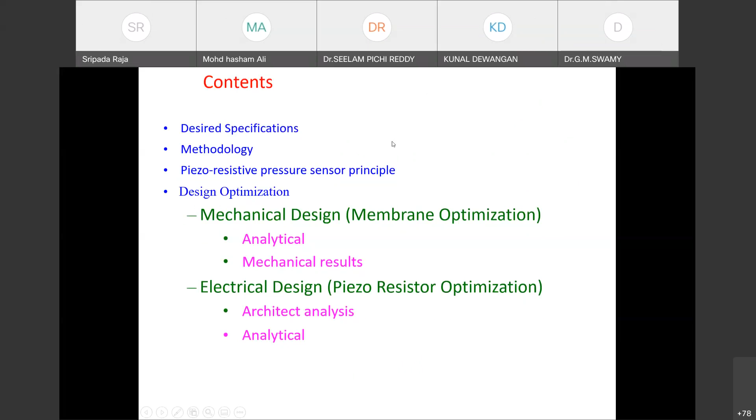Here we have two parts: one is the mechanical design and another is the electrical design. We have the desired specifications that we define, then the methodology of the design, and the piezoresistive pressure sensor principle, which we discussed, and then the design optimization, which involves mechanical and electrical modes.

So desired specification, we'll go ahead with this. We have the measurement mode, the absolute pressure. We have two types: one is absolute pressure and one is the differential pressure sensor. So we are designing the absolute pressure sensor.

Second is the operating range, which is about 50 bar. 0.1 megapascal of pressure is equal to 1 bar of pressure. We have the proof pressure, set for 1.5 times the operating range, and the burst pressure of 5 times the operating range. Non-linearity is less than 0.5% full scale, and sensitivity is 10 millivolts per volt per bar. We have the full scale operation of hysteresis, base resistance as 2 kilo ohms.

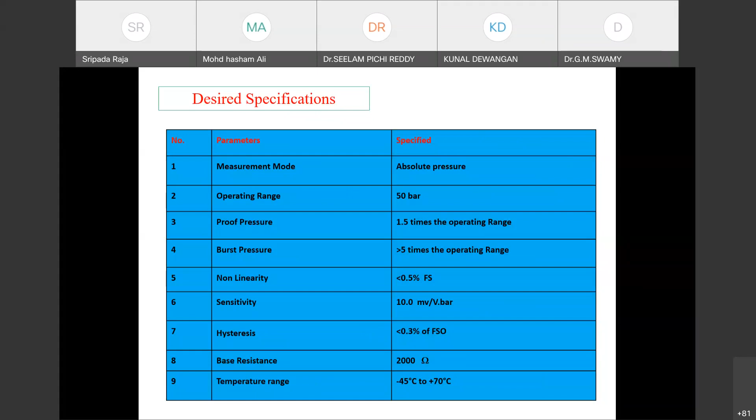So keeping these as the desired specifications, how do we optimize or design the device? That's what we'll be doing. The MEMS pressure sensor transducer development methodology starts from MEMS pressure sensor design and fabrication, and signal conditioning electronics, and PCB design and fabrication.

Here we have the sensor which measures the signal, and we have the signal conditioning system which captures the signal provided by the MEMS pressure sensor.

Excuse me sir. Processes the signal. Sripad sir. Yes. Yeah your voice is a little bit low sir, can you adjust your mic? Oh, is it? Okay fine. Is it fine now? Yeah, yes. Is that fine now? Yeah, yes sir. Okay, yeah.

And then we have the pressure sensor transducer assembly package component, and the fabrication with electrical and mechanical interfaces, and testing is what we do.

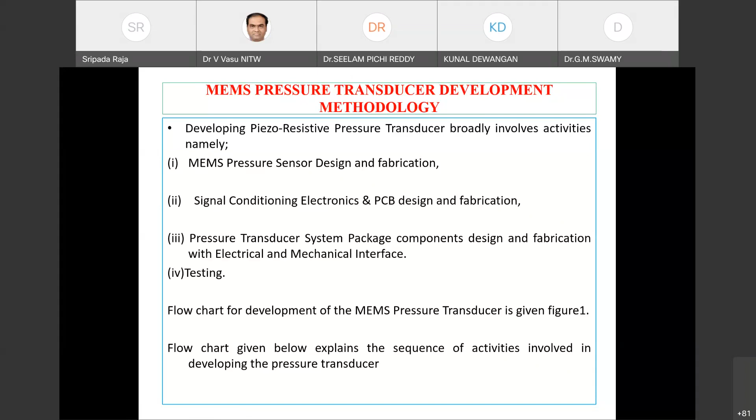And then here we have the cycle of how the flow chart works, from the user specification start, to how we achieve the working model of the device.

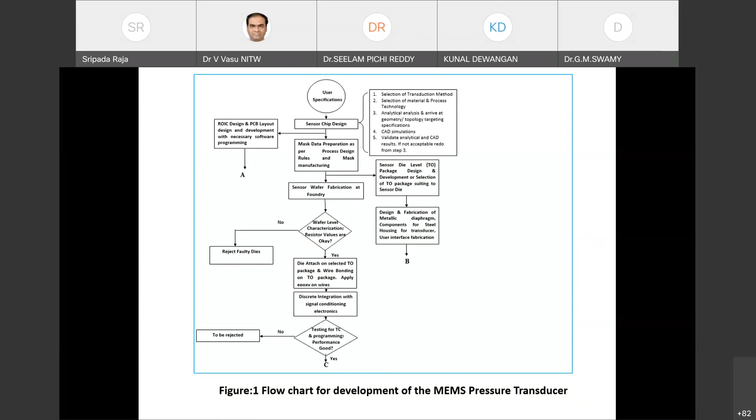We start with the user specifications and the sensor chip, then we have the mask data preparation and sensor wafer fabrication. So this is the method that we adopt.

The pressure sensor has 4 resistors in principle, and 4 of them are connected in Wheatstone network mode. Typically we use an N-type silicon diaphragm with P-type piezoresistors. That's the technology and materials we adopt. The piezoresistors are realized by selective doping, injecting boron into the diaphragm. So that's the piezoresistive P-type piezoresistor in an N-type substrate.

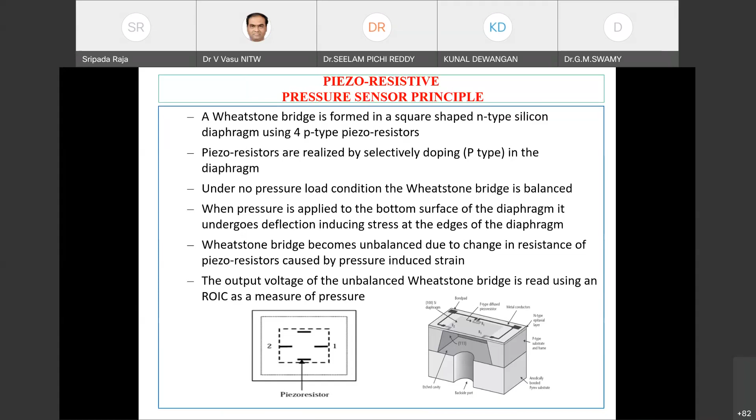Under no pressure condition, the Wheatstone network or bridge is in balanced condition. When pressure is applied to the bottom surface of the diaphragm, it undergoes deflection, which induces stress at the edges of the diaphragm. So let's look into each one of them.

Going to the mechanical design optimization, we have the membrane design criteria. The membrane that we want to deflect due to applied pressure can be calculated using the Dmax formula. This Dmax formula is used to find out, for the applied pressure, what is the maximum displacement that is happening.

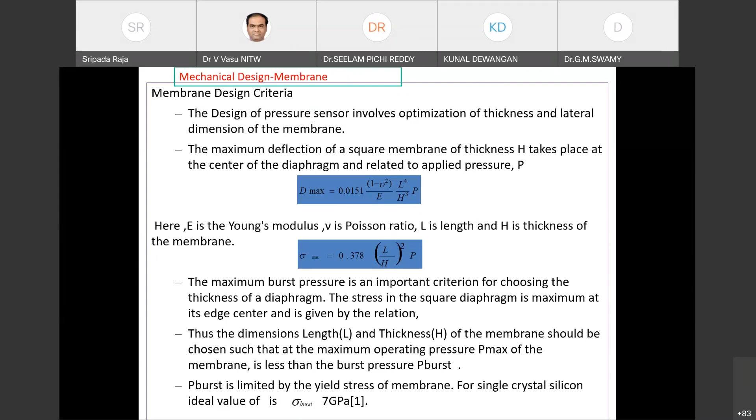And for the stress that is developed, we can see what is the maximum stress, and the burst pressure also. So when we design them, naturally any device needs to meet some criteria.

Criteria 1 is that the maximum deflection of the membrane should be less than 1/5 of the thickness. Criteria 2 is the proof pressure condition: the ratio of maximum deflection at proof pressure to the diaphragm thickness should be less than 0.5. Criteria 3 is the burst pressure condition, where the stress induced at burst pressure should be less than the yield strength of the single crystal silicon.

Based on all of these factors, we achieve or come up with various design dimensions. Incidentally, we have an example for the design requirements which I shared in the beginning: dimensions of 720 micrometer by 720 micrometer X and Y dimension, and a 30 micrometer thickness of silicon diaphragm is a better choice.

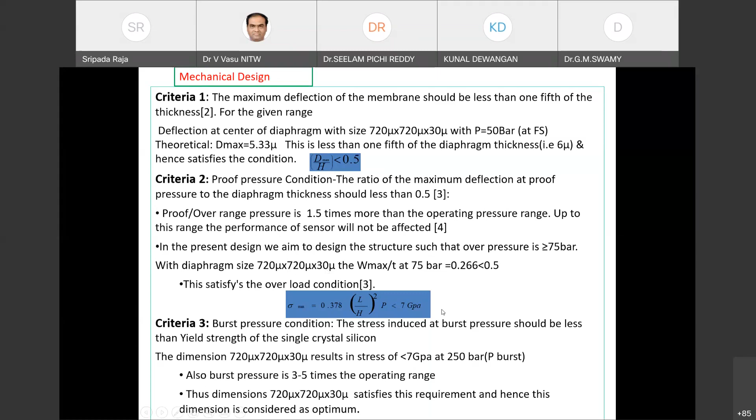So using this, we will start designing them. We can calculate these things using analytical methods. For the applied pressure, we get a Dmax, that is the maximum displacement, at about 5.33 micrometer.

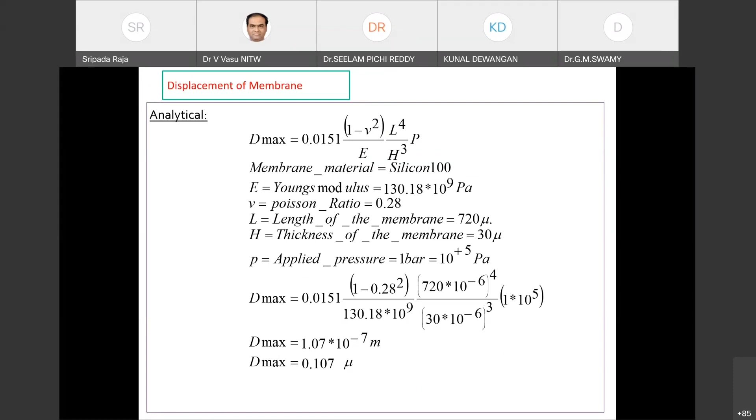And here on the other side, we have the electrical optimization, so the electrical resistance. Let me talk about the piezoresistive part of it.

Piezoresistive material is a material where when it increases its length, its resistivity changes. Due to the change in resistance, we measure the change in voltage drop. When pressure is applied, these piezoresistors expand, and due to that, there is a change in resistance for which there is a subsequent change in voltage.

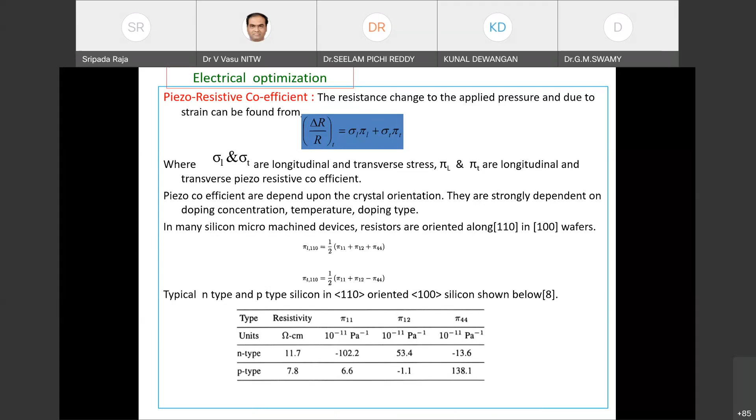These piezoresistors have something called pi coefficients: pi 11, pi 12, pi 44. These pi coefficients are responsible for this change in resistance. So here, what we do is we have a P type that we dope in an N type substrate.

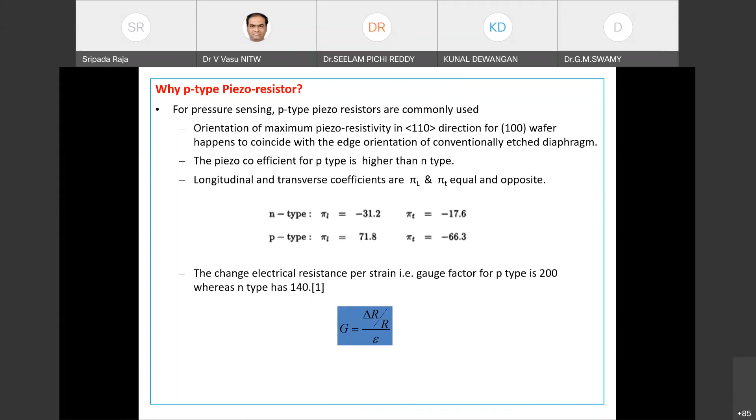Why a P type piezoresistor? Because the orientation of maximum piezoresistivity in the 110 direction of silicon for a 100 wafer happens to coincide with the edge orientation of a conventionally etched diaphragm. That's the reason why we use a P-type piezoresistor.

Now the stress distribution. If you recall the Wheatstone network, the basic fundamental circuit, we have 4 resistors which are 2 in parallel to each other: R1 parallel R3 and R2 parallel R4. It's the same configuration with the 4 resistors.

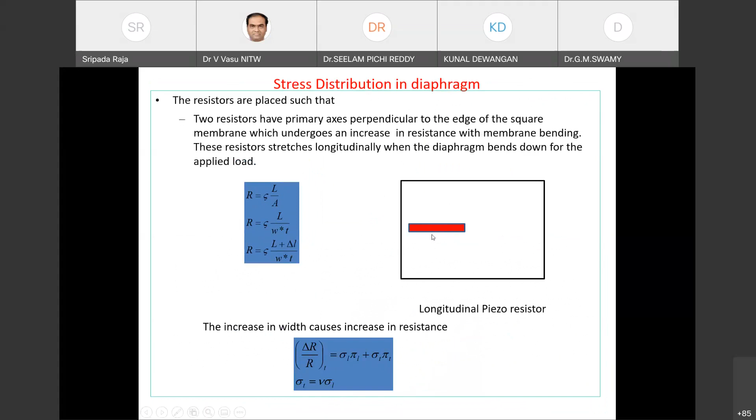These 4 resistors are mounted in this fashion on the diaphragm. Here we have R1 parallel R3, R2 parallel R4. When a resistor is mounted like this on the left side or right side, we call that a longitudinal piezoresistor. The one mounted on the top is called a transverse piezoresistor.

Why do we call them longitudinal and transverse? In the figure below, you can see concentric circles; when pressure is applied either from the top or bottom, we see maximum displacement happening in the center. Looking at the slope from the top view, you can draw concentric rings of the displacement that's happening. So the position of R1, the piezoresistor,

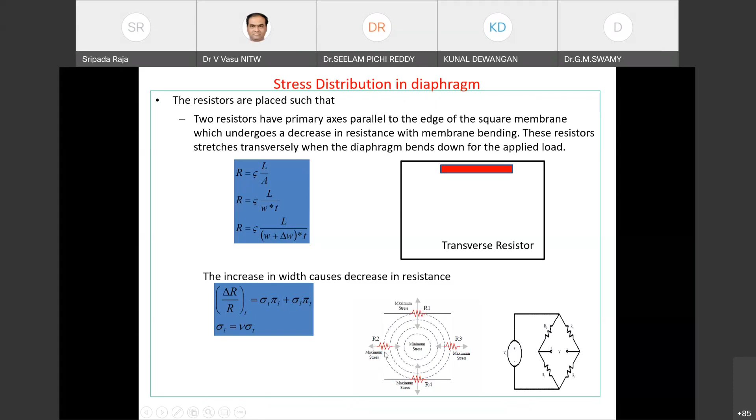experiences a stress in this direction. You can see the arrow, it experiences a stress in the transverse direction. Whereas R2 and R3, the longitudinal resistors, experience stress in the longitudinal direction. For this reason, it's called a longitudinal resistor or transverse resistor.

When this happens, there is a change in resistance, for which there will be a subsequent change in voltage drop. We can calculate all of these resistances using the general formula rho L by A, and Ohm's law concepts. So we can calculate them.

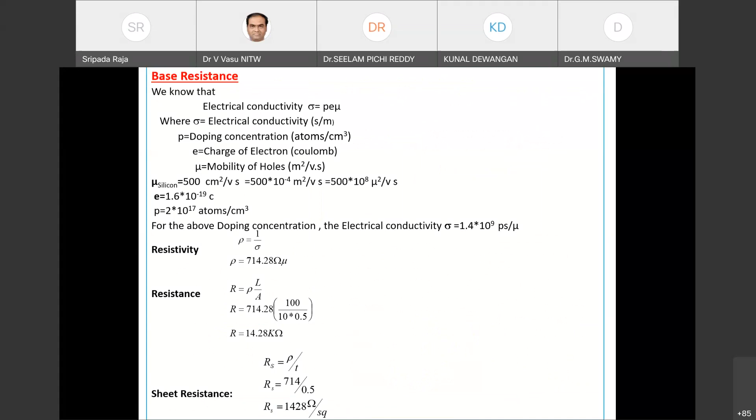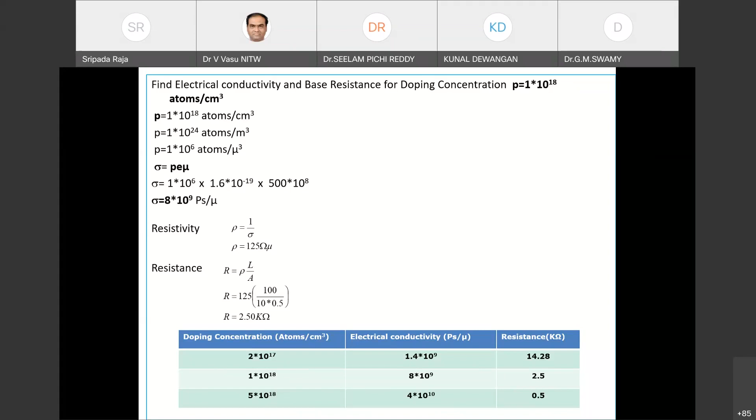And then we measure the change in voltage. With the doping concentration, we can see how it changes the electrical conductivity and also the resistance. When the doping concentration becomes high, naturally the resistance also goes low. So we need a better doping concentration to achieve a better result, better yield, and we need to look at a better doping concentration for piezoresistors.

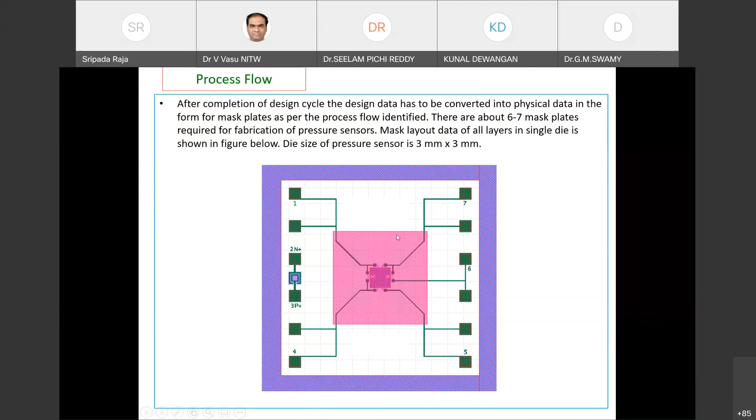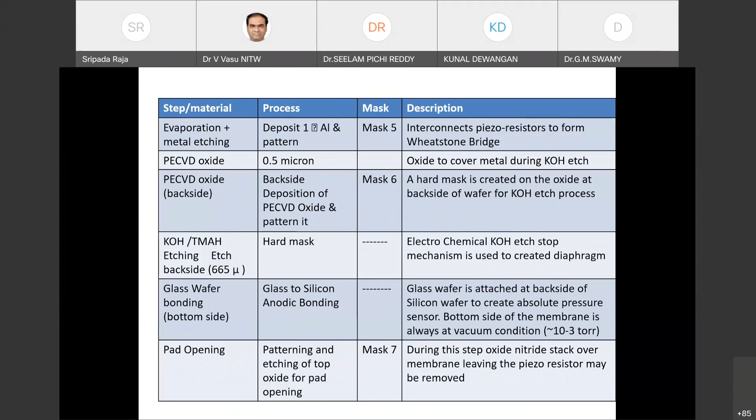So this is just an overview for you to understand what you will be trying to design now using the video tutorial. Okay, so this is what it is.

So now I'll be sharing a video where you get access to that file and you can download it or see it online and follow the instructions. Those who have got access, I hope the installation is all done, and the software is working fine using the standard steps shared yesterday.

So I'll be sharing my link so you can take a look at it. Is anyone having any issue opening the software? You can report it. Participants, I am just unmuting them so you can discuss with them.